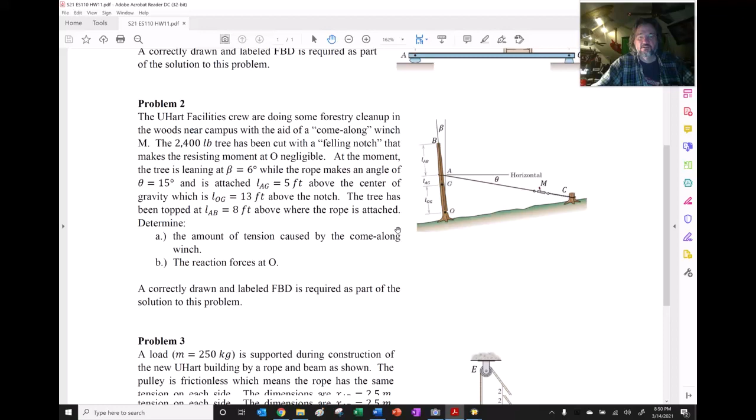Here is going to be problem number 3. One second, let me pause.

Construction of the new UHart building by a rope and beam as shown. Right, so this is this load. The pulley is frictionless, which means that the rope has the same tension on each side of it. So we know that those forces are going to be equal. The dimensions are XAB is equal to 2.5 meters. Right there, or 2.5 meters, another 2.5 meters here, another 1.5 meter, and the mass that's being supported is 250 kilograms, which really isn't all that much.

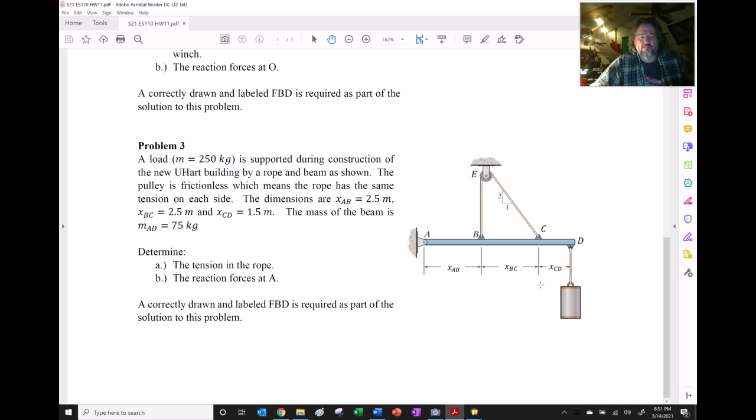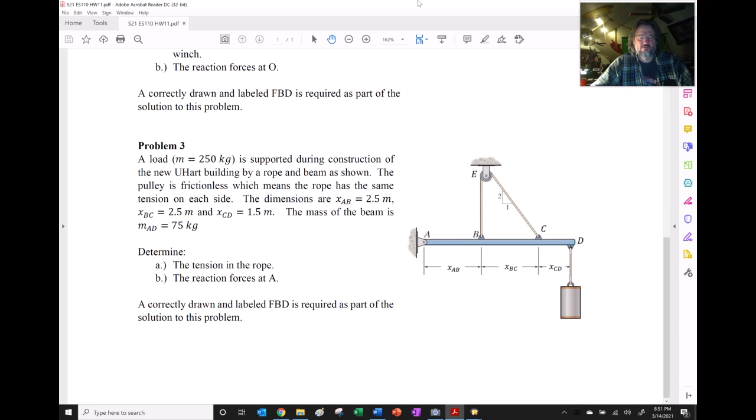I should mention that the beam is 75 kilograms. Here's the mass here. Okay, so we do have a mass at each section. Okay, that's cool. That's good to know. All right, so we want the tension in the rope, and we want the reaction at point A. So let's do it.

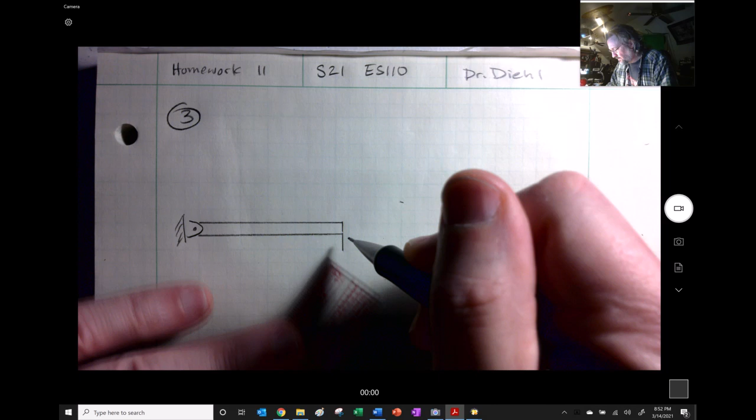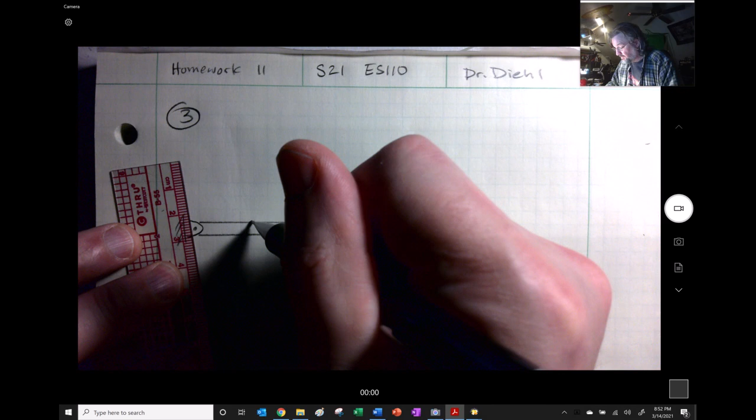11. And if we get to know each other better after you graduate, and we are in the kind of relationship where we know each other, you can call me Ted, but not until then, because I think it'll help your education if we maintain a more formal relationship. Otherwise, I would totally be your friend. Totally would be. I am one of the nicest people you'll ever meet, and I sincerely say that. You just don't know. I care about people. I try to treat people the way I want to be treated. I go out of my way for people. But, I don't know, just like anyone, I could be a bit of a jerk. I try not to be. Really don't want to be, but I recognize that about myself. Try to become a better person all the time. I think that most people can kind of say that. I'm not unique in that respect. But

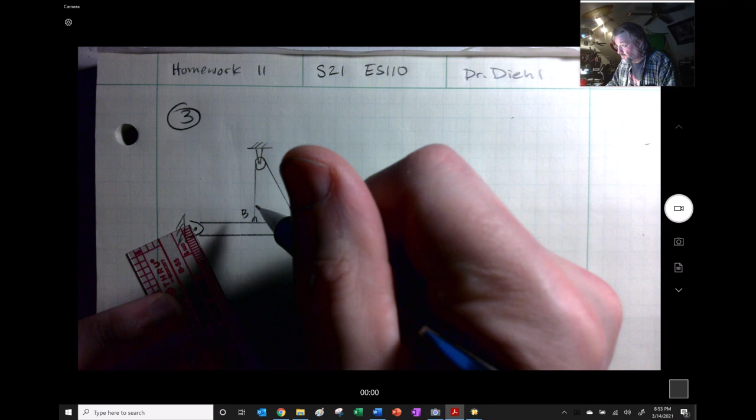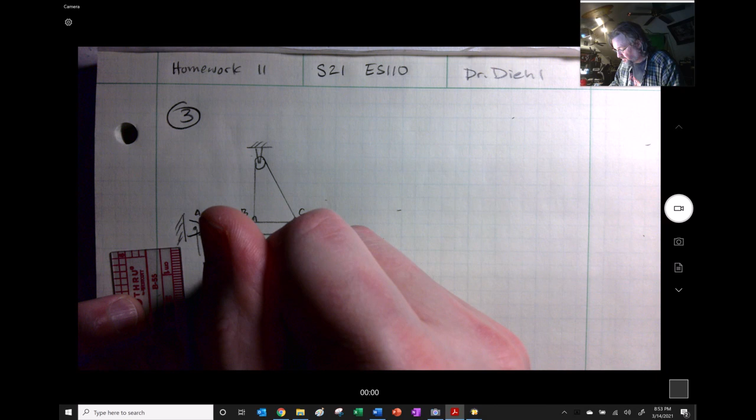I do think the job I'm doing is sort of a sacred thing. To be a professor in mechanical engineering, or in any kind of engineering, it's a difficult thing. You don't do it for the money, right? You do it because you care about other people and you want to see them succeed in something that's very difficult to do. So, if it was easy, anybody could do it. I remember my boss telling me that, and those words stuck with me. His name was Bill McCarthy. He passed away. Is it going on 15 years now? I think so.

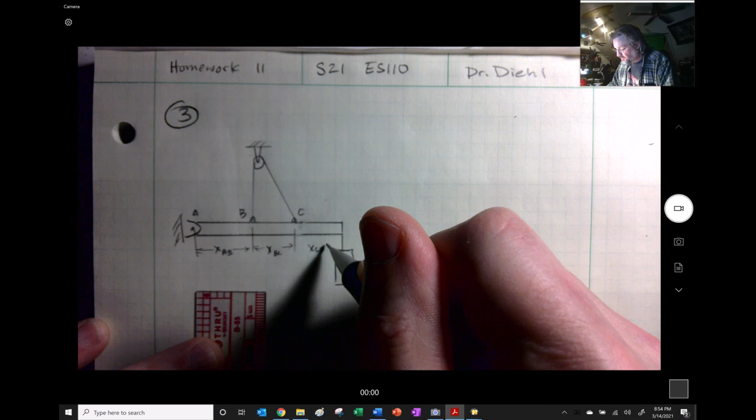And he had mesothelioma, which is a cancer that you get from asbestos. And he definitely got it from asbestos because he worked on board ships and in shipyards during the Vietnam War. And he was surrounded on steamships by asbestos. They even had occasion to throw it around in a funny way, and I guess that really wasn't that funny when everything was said and done.

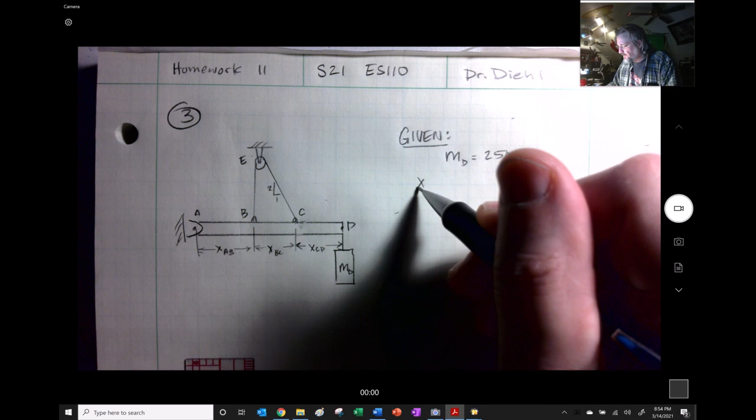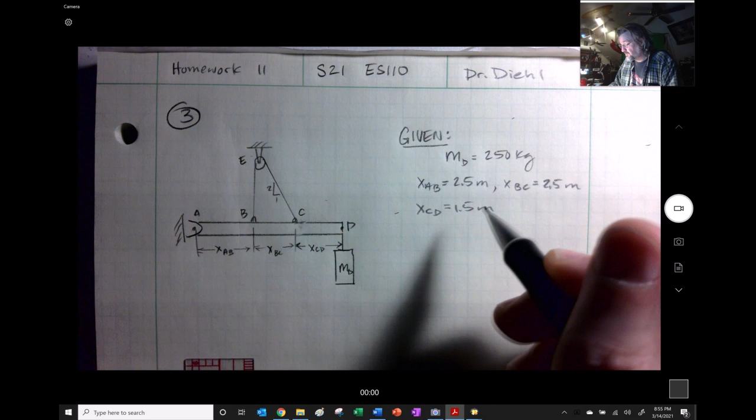Okay, so this angle right here is 2 and 1, and the givens that we have here is that we'll say that this M right there is going to be the mass. I'll call it MD. MD is equal to 250 kilograms. We'll say that XAB is equal to 2.5 meters. XBC is 2.5 meters. Well, there you go. We could have said they were equal to each other, couldn't we? XCD was equal to 1.5 meters. And I could have given you this angle right there, but I didn't.

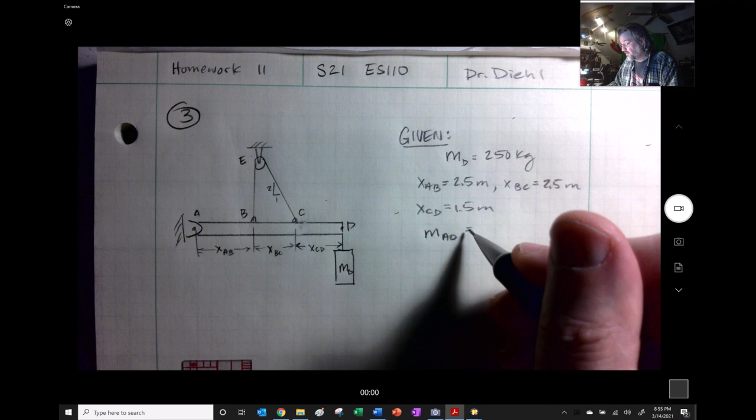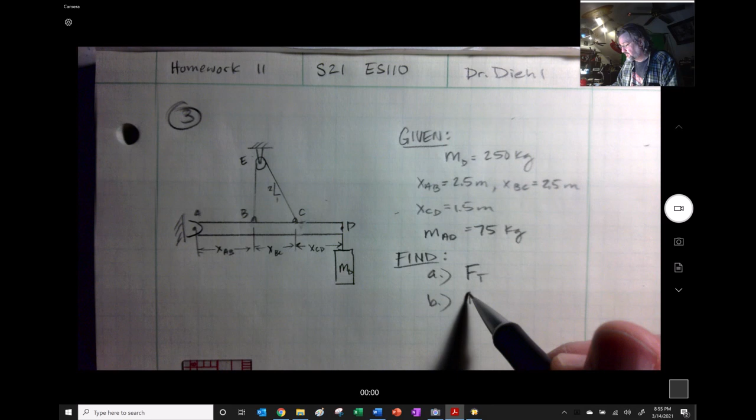And I can see that mass of, I called it AD, that's the mass of this whole thing, is going to be 75 kilograms. So we want to find the force of the tension, and we want the reactions at A. Very, very, very standard problem. Important things to be capable of doing. Maneuvering through a problem. I think it was a pretty good problem to pick. Sometimes I'm not so sure which problems I should pick and which ones I shouldn't pick. This one, I'm feeling pretty good about.

We'll define an FBD. We'll say what X and Y is going to be. We have a force that's going to be in tension here, and a force that's going to be in tension right there. So we have FT and we have FT at both of these things. We will have a reaction at A in the Y direction here. Because this one is coming kind of that way, and we may want to draw it up to make sure that the thing has an angle, we know that we're going to have a reaction over here in the opposite direction. So that's going to be RAX.

And then this one, we could call it WD. And then this one too, let's try to get this thing so it looks like it's in the center. I didn't really quite do the proportions of this right. So this is 2.5, 2.5, and 1.5. So the center might be somewhere like right there. So this is going to be the weight of AD.

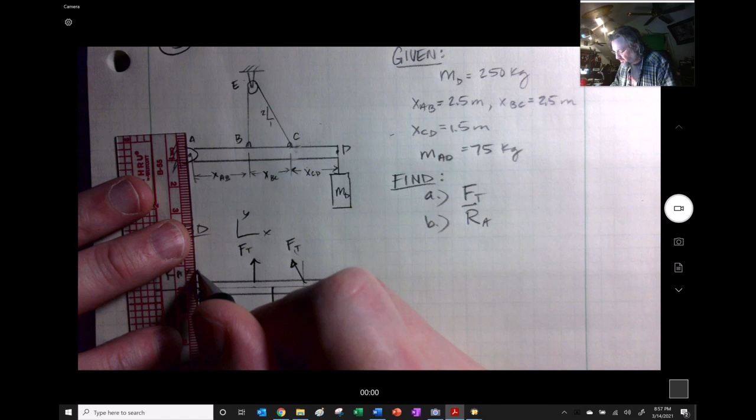And so let's try to see if we could dimension this thing out without getting things in its way. This is 2.5 to right here. Okay, this one right here is going to be 1.5. And let's see, these are all meters, so I guess I didn't write what that was. In between here is 2.5. But the whole length of this is 2.5 plus 2.5, that would be 5, plus 1.5, that's 6.5.

So 6.5 is going to be the distance between here and here. But let me subtract out. Is that fine? Is that okay? I think it's okay. I'm just a little unsure. This is 2.5, 6.5, 6.5 divided by 2. That's what I thought. 3.25. 3.25 minus 2.5. And I get, this is 0.75 right there. Okay. For some reason I made a mistake in this.

Let me figure out what the weights of these are. I could just leave them as masses and multiply, but I saw many people get this wrong. The weight here of this thing is 250 times 9.81. And that's 2,453 newtons.

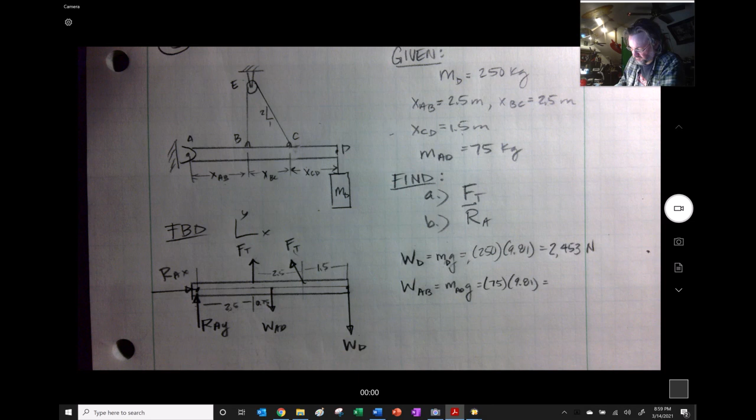The weight of the beam, M, and I should have been this AD. This is the beam. Sorry, D. This is AD times G, right? Is 75 times 9.81. Right? So that should be 735.8 newtons. Right? So let me write out, take some space up here. Sum of the moments about A is equal to 0.

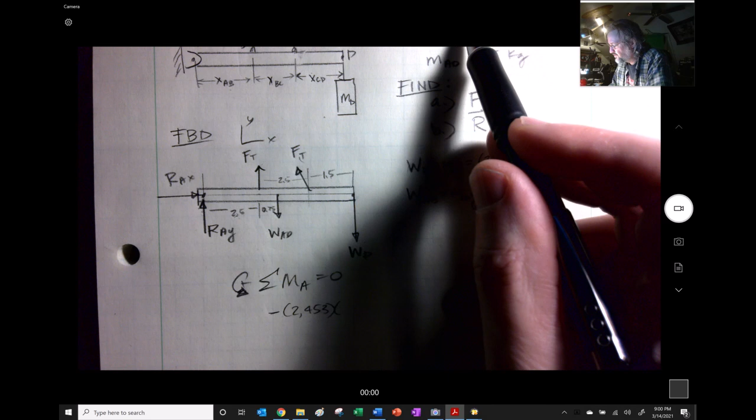And we will have clockwise, let me start with him. He's the biggest one. 2,453 times this whole thing right here. So that's going to be, what did we say already? 2.5, 2.5, 1.5, 6.5. Great. This guy's also clockwise, and he is 735.8. And now we're going to go 6.5 divided by 2, 3.25 meters.

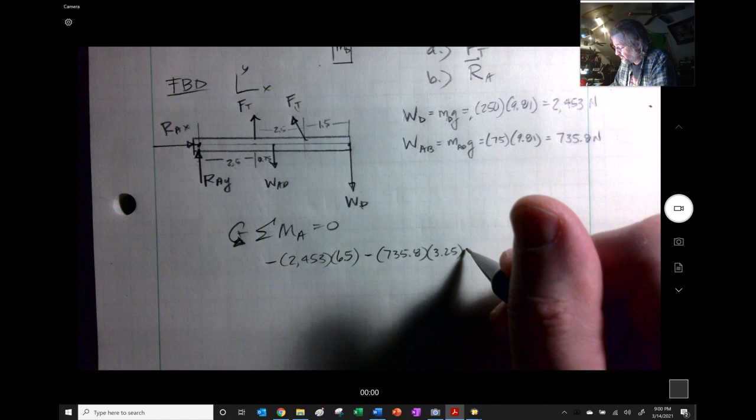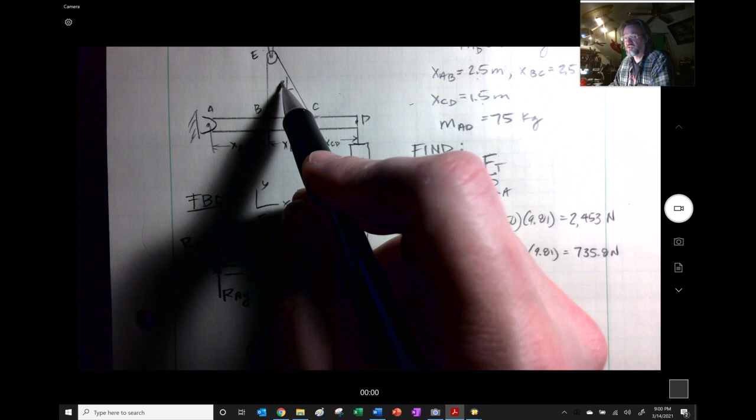We have this guy right here. We don't know him, but he's going positive because he's going counterclockwise, and that's going to be the 2.5. And then we got this guy, and got to be careful here because we were told that this was 2 over 1. I don't like these sort of things. I would prefer to have an angle. So I'm going to call an angle right here, and I'm going to write them really small, and I'm going to say that's going to be rise over run.

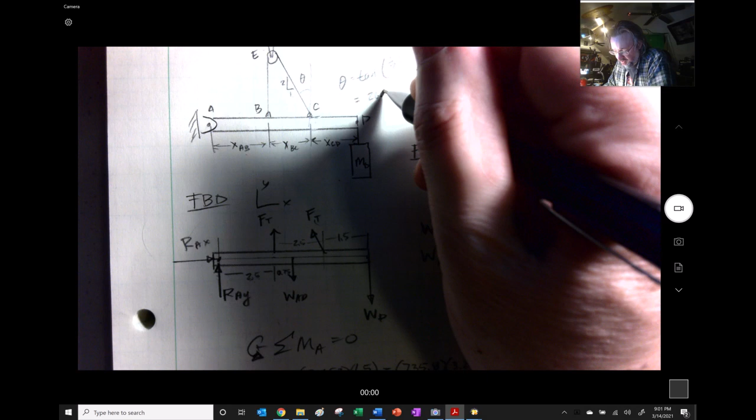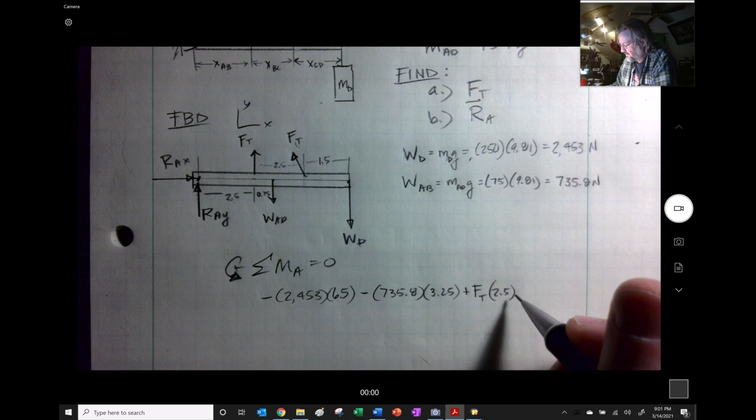So that's the inverse tangent of 1 over 2. That ends up being 26.57 degrees. I just prefer doing that to then trying to play around with these ratios. You totally could for the ratio, but it just bothers me. I don't know, just force of habit. So anyway, so that means that this thing right here has got an angle of 26.57 in there.

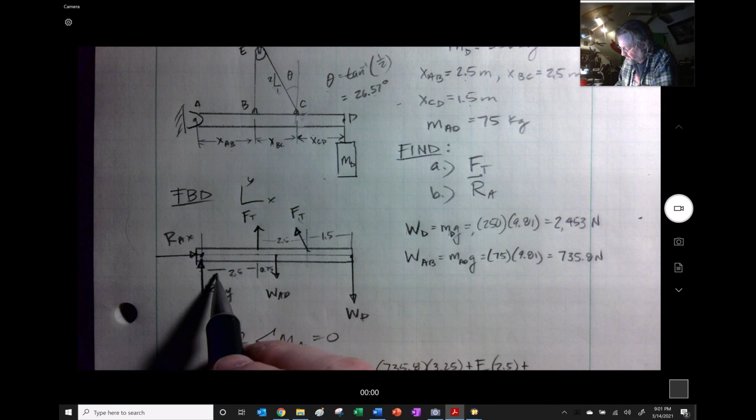So I only want to use the one that's perpendicular to my, it's going counterclockwise. So it's going to be 2.5 and 2.5. So times 5 plus FT. It's only going to be the cosine of 26.57 times that distance of 5 equals 0.

I got to tell you, I've watched many people struggle with the thing I just did. So if you don't understand it, let's have a meeting together and let's work through how would we try to organize your thoughts to try to make sure that you get that same answer. It's an important milestone as you're going through the thing, right? That you break this thing apart and you start to piece this together.

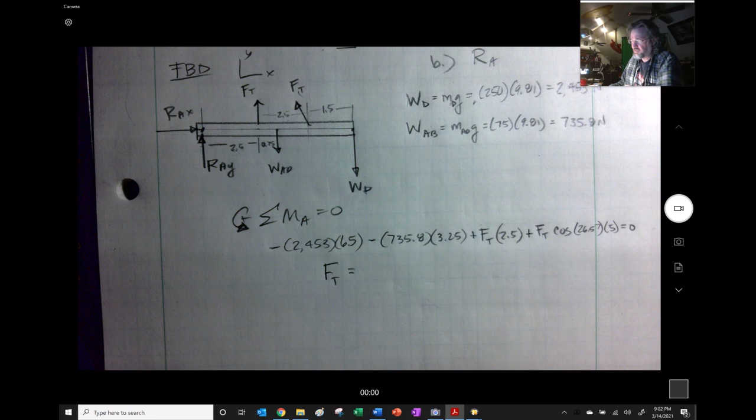This is probably, I would say, the most important class, most important homework assignment that you have in this semester. If you can do this, you could probably work through some of the harder problems if you could think your way through this particular topic.

I almost think we maybe should get rid of some of the other topics in the earlier part of the course and just really hammer home this skill set, because this is what I see students lacking and what I find to be the most important thing that you have to work with. But I will not hit that any harder.

Okay, so I have that. I'm going to take this 735.8 times 3.25. Add them together. So those two things. Now I have to divide by 2.5 plus whatever that's going to be. So I take the cosine of that angle times 2.5. Nope, darn. Times 5. Then I add it to 2.5. And I divide.

And I probably made a math mistake somewhere. It's a good chance of it because I just made a little hiccup here. So, math mistakes are part of the thing we're trying to learn not to make, so they count. Not a lot, but they do count. So I got that together, and then I take my 26.57, the cosine times 5, and I add it to 2.5, and I divide it, and I got the same number. So I have a pretty good idea that that's going to be the correct tension.

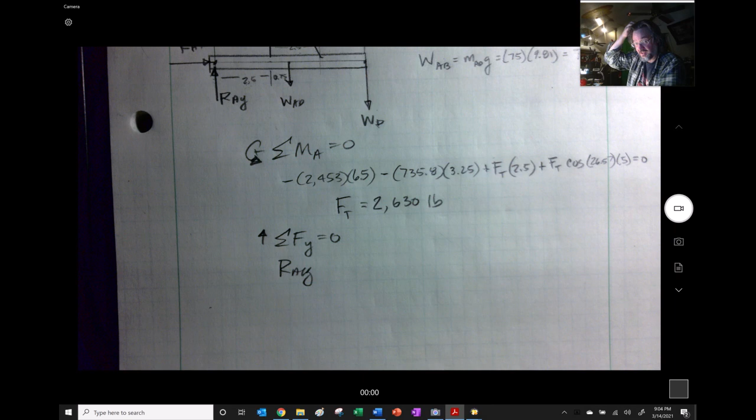Now let me get the sum of the forces in the y direction equals 0. My reaction is RAY. I don't know for sure that it's going to be up. There's a chance this is going to be down. I just chose it in the upwards direction thinking that's got to be right, but we don't know for sure, because we have these guys competing with these two guys. So let's take it. I got RAY up, FT also going up. That's at 2630.

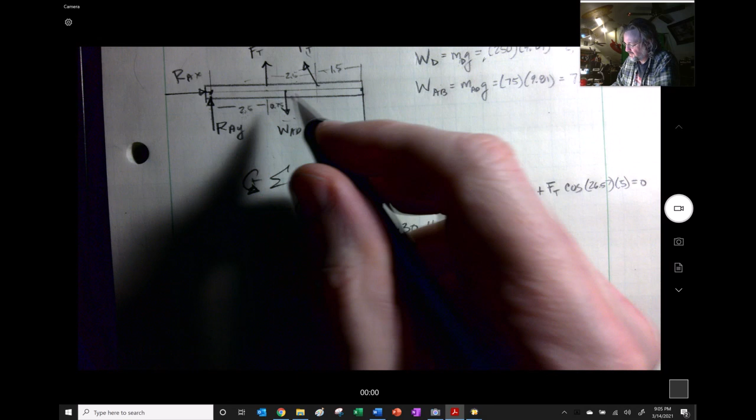We have this one, but then he's also going up. But he's going to be the cosine of our 26.57. Now we also have that coming down, which is going to be our 735.8. We also have this going down, and that's going to be our 2453. Oh, I got my comma in the wrong spot, and my hairs are falling out. 2453 equals 0. All right, so let's see what RAY equals. We could be in the wrong direction.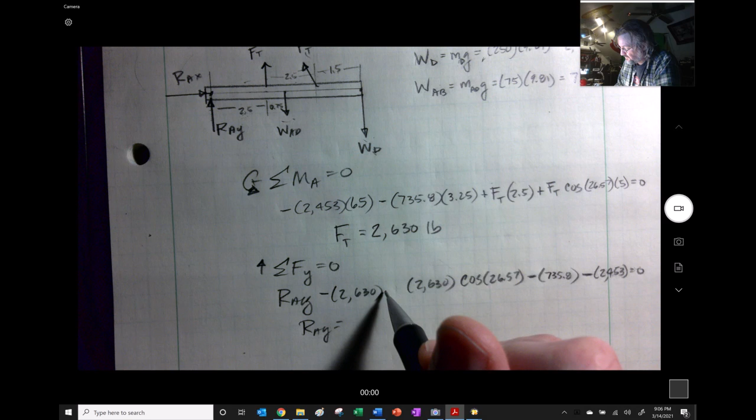So I have this guy, and I accidentally wrote that minus. No, that should have been plus. They should both have been plus right here, because this one is going up. That one is also going up. That's going down. So let's get these right. Okay, yep, that's going down and that's going down. Did I get these right? A double, triple check. Okay.

26.57 cosine times. I'm going to add those two things together. That's a lot. I think we're going to end up with a negative number here. Let's take out the 735.8, subtract them, and the 2453, subtract them. Yeah, sure enough. That's interesting. I just want to think through this whole thing right here, because that is an interesting dilemma here. Both of those things coming up.

All right. I guess that makes sense. We're almost like a teeter-totter, where this thing is in the center. This is pulling down, so this has to pull down, right? If you think about it in one respect. Okay, so I get a negative 1,793 pounds, which is going to be 1,793 pounds coming down. And then summation of forces in the x direction equals 0.

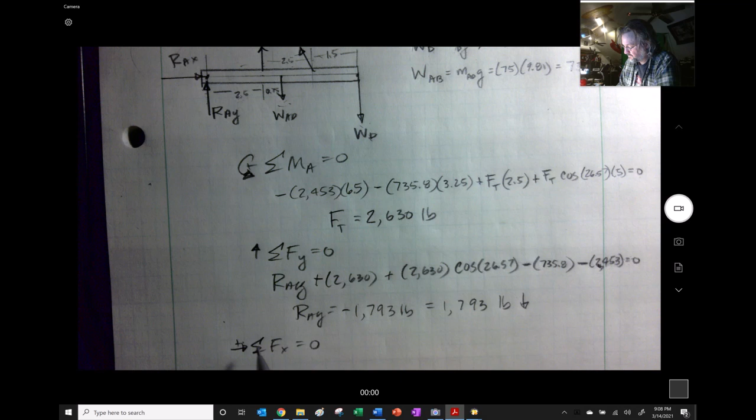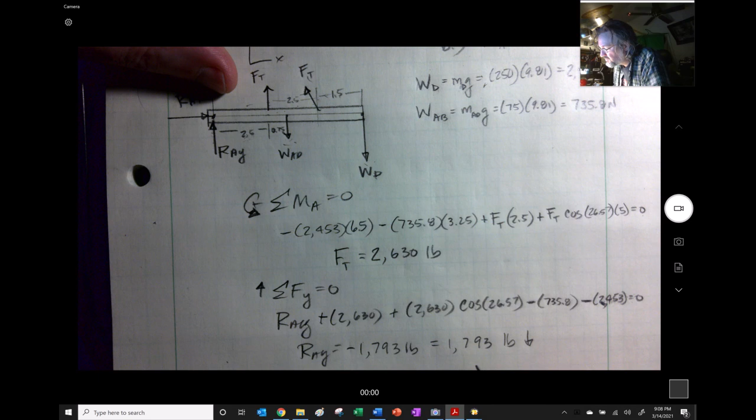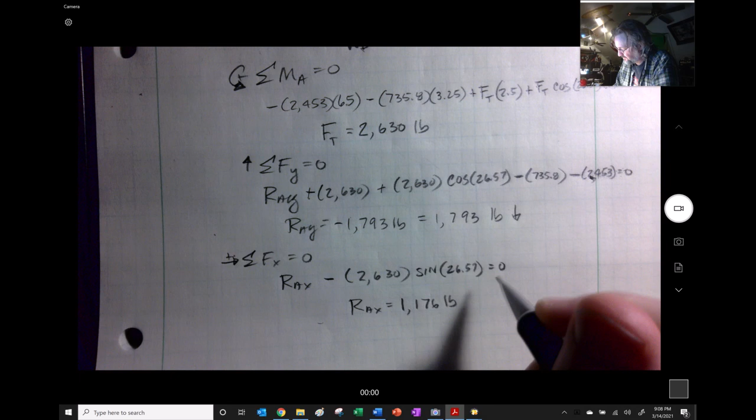We say our RAX, and then the only thing we have coming in the negative x direction is going to be a negative FT, which is 2,630, but it's only the sine of our 26.57. So we get an RAX of 1,176 pounds, and as drawn, that direction. So let's write out the answers.

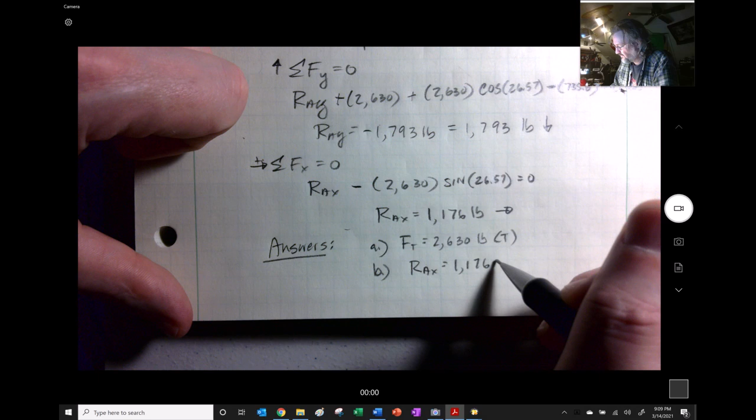For part A, the force of the tension is going to be 2,630 pounds, and I'll keep writing out that it's tension. B, we're going to get that RAX is equal to 1,176 pounds. RAY, and this is the surprising one, is 1,793 pounds and downwards. And I probably should have gotten the magnitude, direction, magnitude, angle, and quadrant,

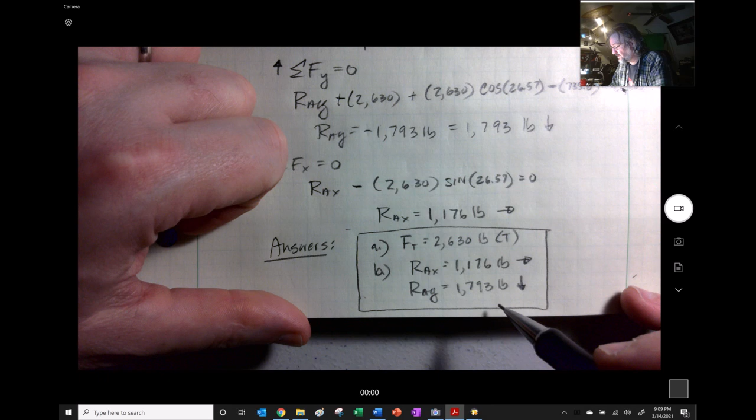but it's been a long time, been a long weekend, and I'm going to leave it like this. It's just as valid to be saying that it's there. So there you go. Here's the solution to this problem. This is a really important one, so make sure that you're able to do a problem like this. That's it.